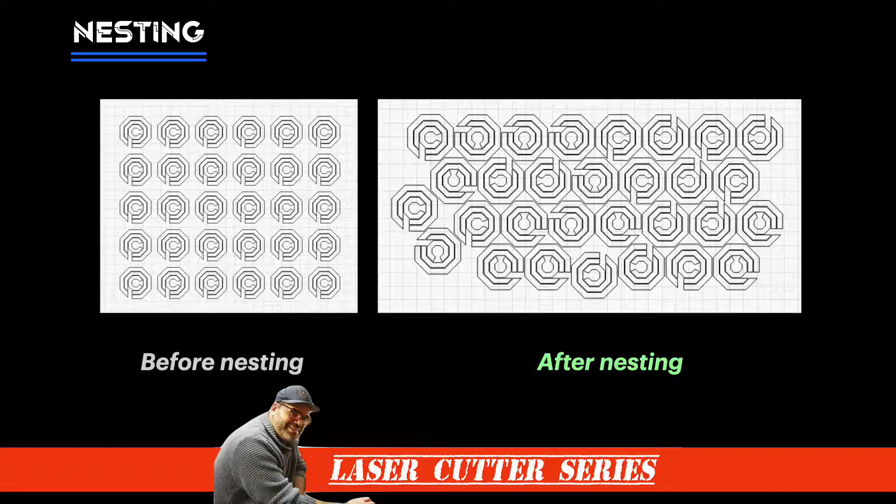Here are some examples of projects before and after the nesting process. As you can see, parts are laid out together, sharing cut lines, as well as working out how to utilize the material with the least amount of waste.

Because material costs are a large part of your process overhead, you want to get the most out of your material. With nesting, you can place more parts in a more compact space, which means you can get more out of your material and make the jobs run faster.

And that leads us into machine costs. The more time it takes to cut a design, the higher the price. Keeping pieces together reduces the travel time between the parts, making the cutting process a whole lot quicker, and the more effective your layout, the more time savings are passed on to you.

Now, if you're new to nesting, there are a number of options available to try out the process. Like everything, you can purchase dedicated services or software to do the nesting for you. But for this tutorial, let me share with you two free sites that are online and will allow you to try out nesting your designs.

The two sites we're going to look at are SVGNest and DeepNest. SVGNest requires you to upload an SVG file to allow the software to process your design online. DeepNest is an actual application that you can download and run locally on your computer.

Lightburn has integrated the functionality of SVGNest into its software, so all the heavy lifting and preparing of files, as well as sending them to the website, is streamlined and accessible from Lightburn's menu. So let's jump in and walk through how you can use nesting with your designs directly from Lightburn.

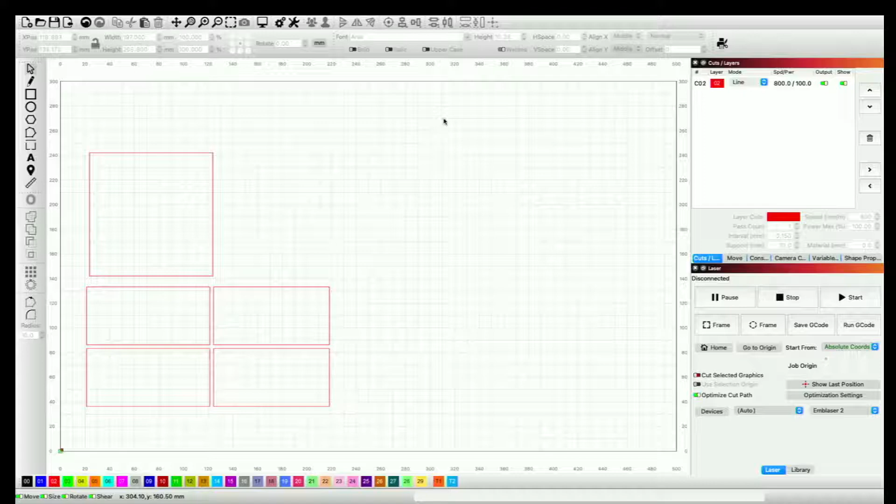I actually have them in my art library, and the very first one I'm going to bring in happens to be just a plain box, a normal box. You can see it's straight edges, nothing really too fancy. But if you imagine that I want to make three or four of these boxes, or I've got a piece of offcut that I want to make a box out of, I'm not too sure if this configuration is the best configuration that I can use.

So I like to keep all my processes kind of uniform. Black usually is my line cut, so I've just changed that over there.

I'm going to imagine that I have an offcut, so I'll create a piece just over here and say my offcut is, let's say, randomly, this big. Off the top of my head, I can grab this and bring it in here. Yeah, it kind of fits, it kind of doesn't fit. It's a little bit short, a little long, but this is where nesting is going to be really amazing. So to set up the nest...

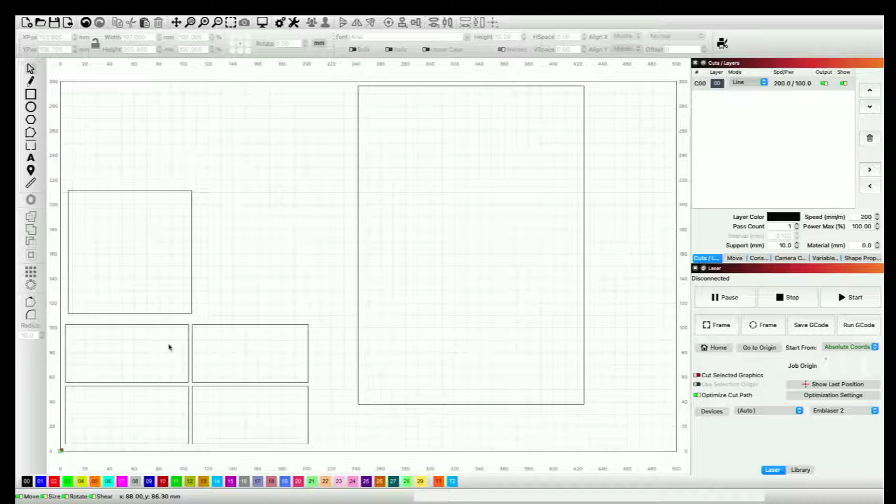Why this is important: you need to know what the material size is, because SVGNest needs a place to put all these pieces into. The way to actually set that up, and I've tried this a number of ways, and this is the most successful way, is to grab your designs and actually move them off the workspace. Don't ask me why, but if they're on the workspace, it kind of creates a double space as such.

I just want you to avoid some of the pain that I've discovered in the last couple of days. So it's really good to take this design and move it outside of the work area, and then leave whatever your definition of the material you're actually going to cut on the workspace.

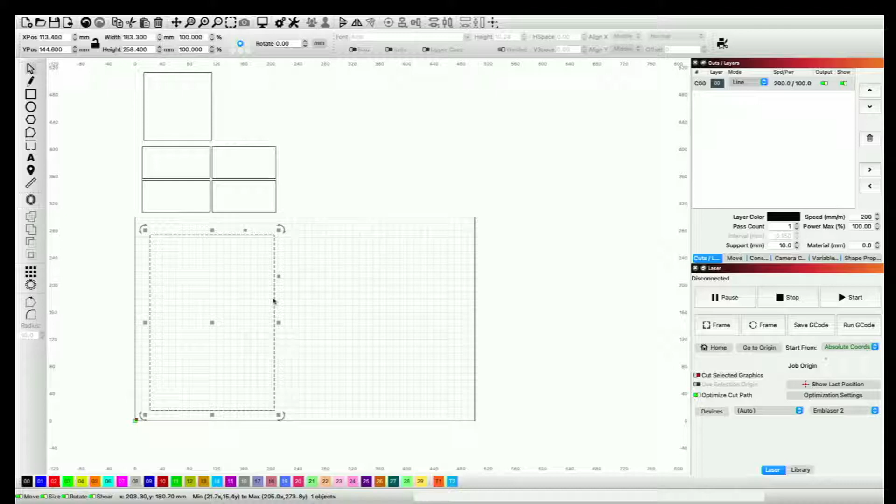From here, it's pretty simple. What you want to do is select all of them, or alternatively you can go Command A, select all, and then you come up to Arrange, and there's a new menu item here called Nest Selected.

When you hit that, immediately it's going to pop out and open up a browser window. I'm just going to open it up all the way, and that is actually sending us to SVGNest. SVGNest has nothing to do with Lightburn - this is a website, a free and open source nesting site for CNC laser or even plasma cutters.

This website is going to do the bulk of the processing for us, because there happens to be a little bit of processing and AI and kind of wizardry in the background here.

Our job now, the first time you do this in Lightburn - let me jump back to Lightburn, give me one second here. You'll see a pop-up that says the file name to import has been copied to the clipboard. Press OK when nesting is complete. It's a little bit cryptic.

What I've discovered is that if we pop back into... okay, it's not going to let me do it because I've trapped ourselves in this cycle. So that's interesting. While we're in here, it's waiting for the result, but I did want to show you that pop-up. So I'm going to hit OK, and I'm going to cancel that. I am going to go and start this nesting process again because it's locked us out of it.

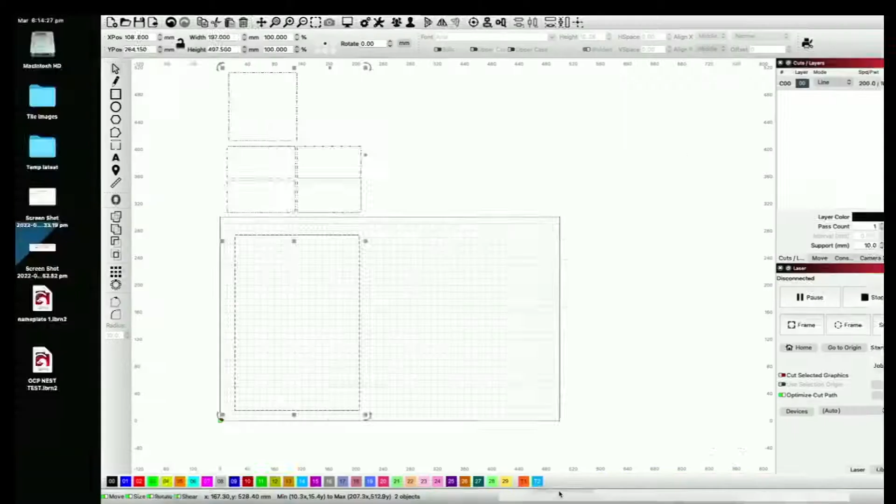It sends it out. Let's go pop over to good old Lightburn. And then it says here the file name has been imported, hit OK. And now it takes us back to our download area, or directory, and we've got an SVGNest output.

And the latest one, if we come down here, actually shows that design on that piece of material.

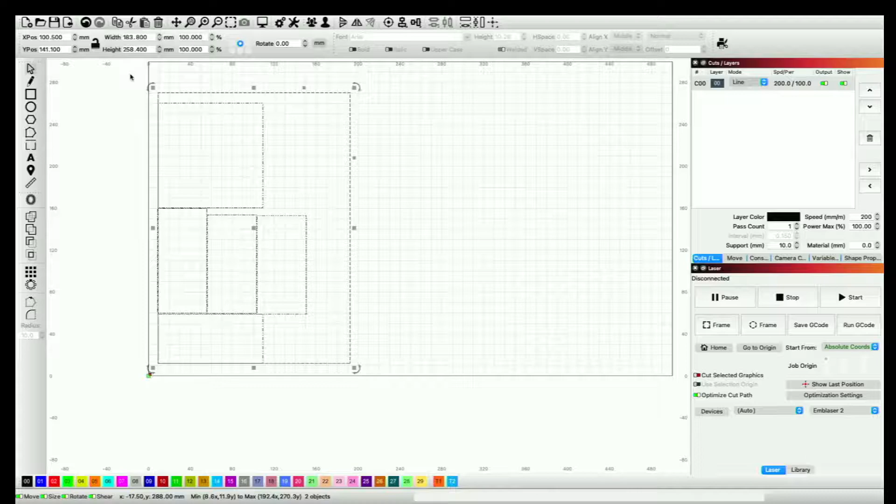So I can do a number of things now. I'm going to select it all—they're all individual pieces at this point. So I can come in and move it to my origin point, stick my piece of material in. Now I don't want to cut my material, so I can just delete that.

And I have an optimum path, not only cutting the pieces out, but also you can see here we are cutting on certain lines, so it'll be a faster process. Let's go and see here, see how it works.

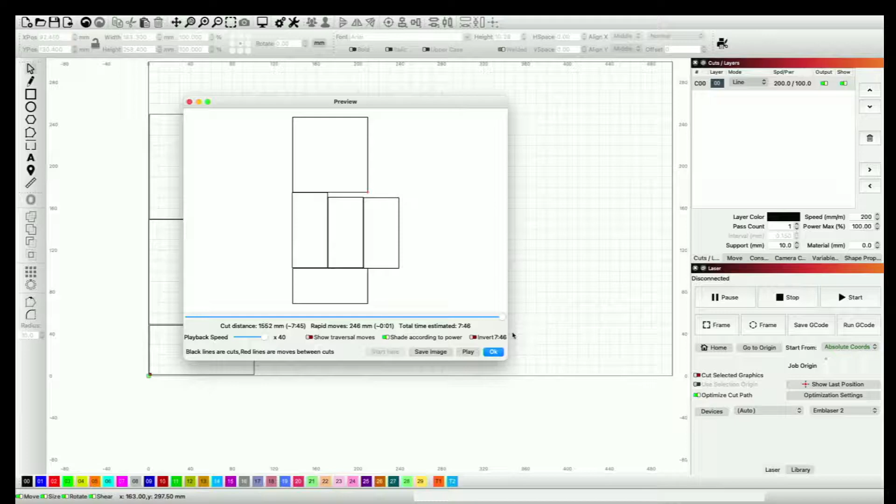There we go, perfect. So we have all those parts cut out pretty cleanly. All right, that worked well. That's the basics of using nesting.

You can see it's all integrated into Lightburn, but what if we want a more complex design? This is where things get a little bit interesting—I was going to say tricky, but not really tricky.

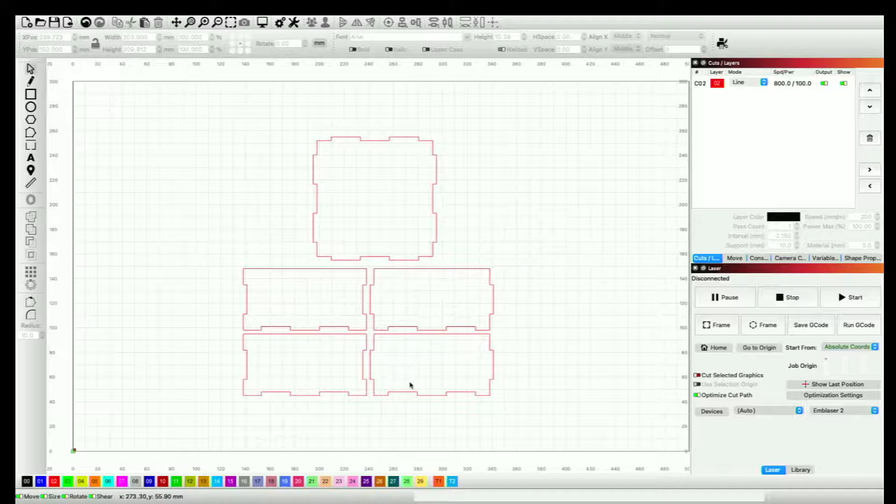I have another design here. It's the same box, and it happens to have finger joints, which means there's a little bit more to process for SVGNest. So let's first of all change it to a black line.

And I'm going to just move it over here, and draw myself a little bit of a box. Again, I'm just making this up as I go along.

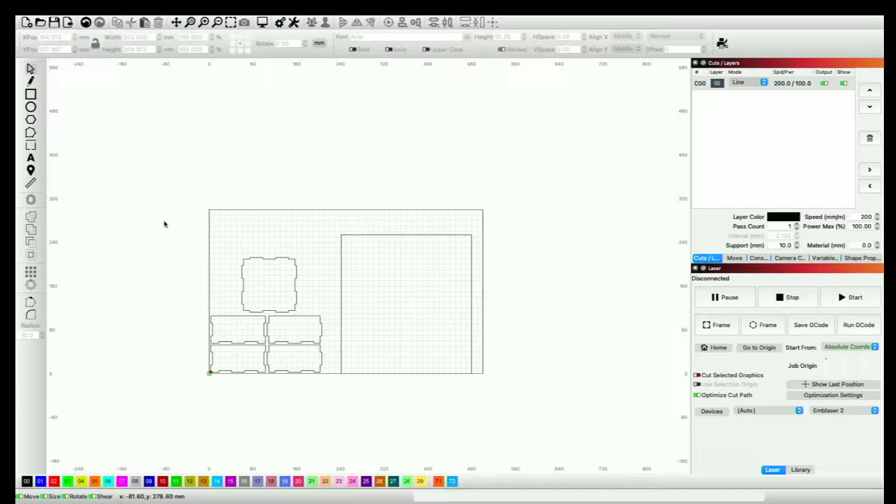The other thing I want to do is take this design and move it up here. If I leave it like this, actually, let's do an experiment—I haven't actually done it this way before. Let's see, we go upload SVG. Here's our Lightburn nest.svg. Let's give it a shot.

Start the nest. And you can see here, it's only put 3 parts. Well, it's now 4, but it may take us a long time to get that 5th part in. That's because what SVGNest is doing is it's taking into consideration all the different parts of the shape, all the different lines, and trying to work out the best configuration.

So if you're doing lots and lots of pieces that happen to have finger joints or cutouts, the more complex, and wow, that actually did that a lot faster than I thought. There's 5 by 5 pieces in here, so it worked it out a lot faster. I ran this once before, and it took me actually 500 iterations before it actually placed all 5 parts on the material. Could be because this piece of material is a little bit wider, a little bigger.

But I just want to show you here, compared to the original box shape that was just straight lines, how SVGNest is actually, I won't say struggling, but got more work to actually get this in the best orientation. And you know what? As it's working, you can see here, it's kind of butting up a lot of those lines. It's coming very close to what it can do, but it's got these pieces just kind of floating. So we'll let that run a little bit longer.

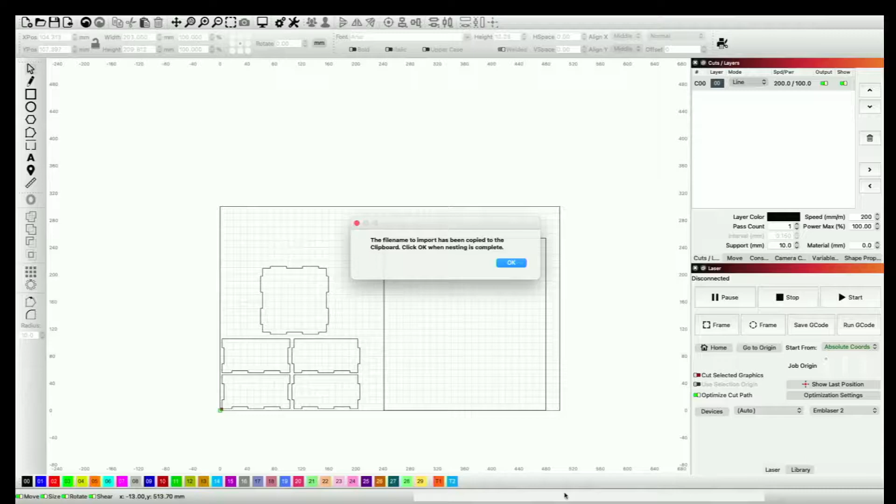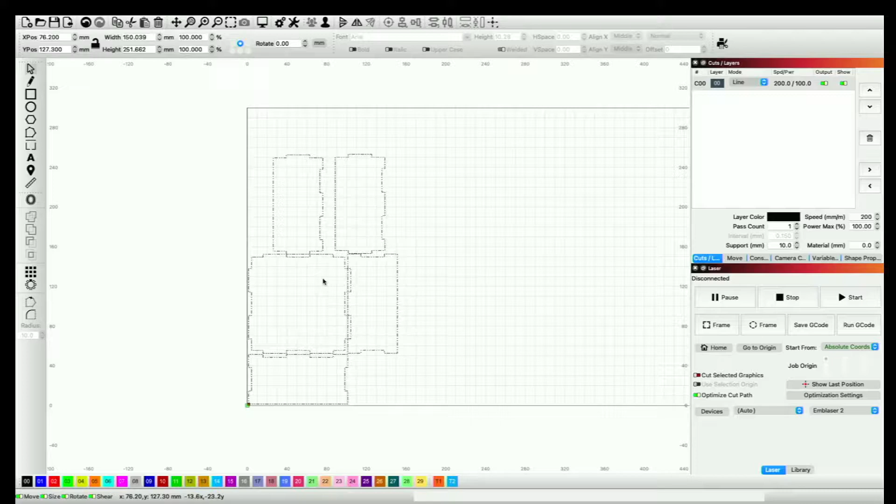All I need to do here is just pop straight back into Lightburn, hit the OK button. It's going to pop up my downloads directory, and I'm going to import it in. And you can see here, just like last time, or in this case, as I said, it was individual, I can delete the material and just bring the design in, put it as close as I can to my origin point, load up the machine and run.

I want to show you SVGNest kind of struggling with a little bit of a complex job. So in this case, what I'm going to do before we get the artwork is I'm going to place a full piece of material into my workspace. Now, in this case, I do have to take the design out because it's not on the workspace at all. So let's go up to my window, the ever-loving art library, and I'm going to grab that finger joint.

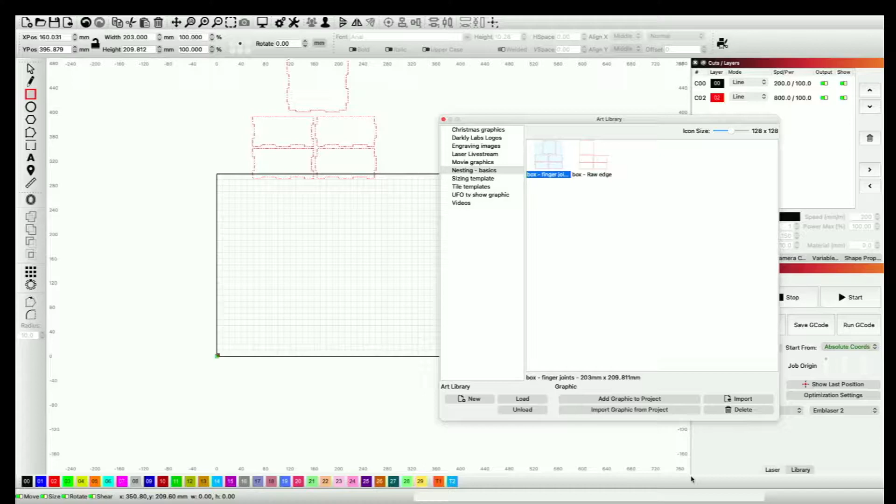And what I'm going to do is just close the art library up. I'm just going to scale this a little bit, if I can actually cancel out into the right thing. Let's do that. Just going to scale it down just a little bit. And of course I'm going to make that black as well, because that reminds me that that's a cut line. It's a good habit to get into, I think anyway.

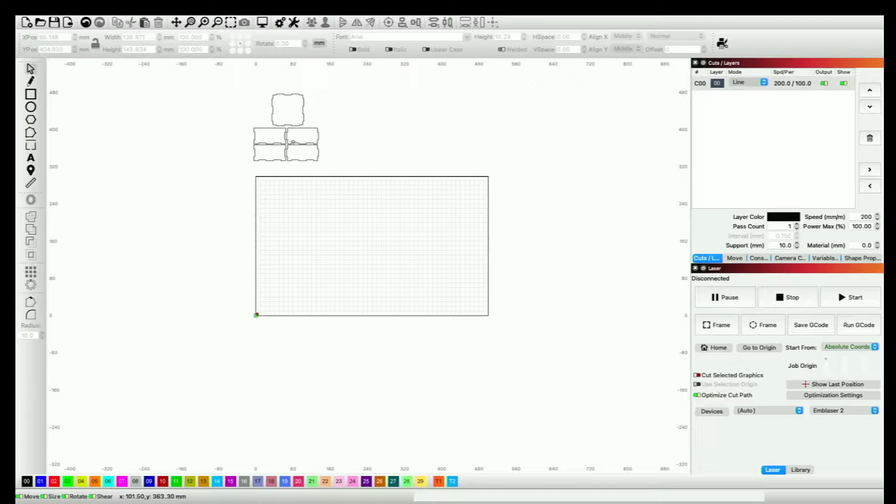So we're going to copy it. Let's copy one here. We'll just make sure it's not touching. We'll copy another one here. Let's see if we can just back out a little bit. I'm going to do another one here, another one here, and another one here. I'm going to hit Command A for all. Come back up to arrange. Hit the nesting selected. It pops me straight back out to the ever-loving SVGNest.

I'm going to close the other windows so I don't get confused. I'm going to upload. Of course, the first file always is the Lightburn nest file. Here we go. It's asking me, click on the outline to use as a bin. That's my material size that I'm using. Let's see if I can do this. There you go, it's selected. Now we're going to start nesting. And you can see here, let's see.

Now, in this case, it's only put half of those down. It's only put 15. It just got 16 in. Now, we know that it'll fit. There's no problem there. But because it's taking into consideration all the different lines that make up the sides of these boxes, it's going to take a bit of time. And I don't know how long it's going to take. And you can see already the process is a lot slower.

So the more you load up SVGNest with complex geometry, the longer it's going to take. But the good thing is that once you've run it once and you've got the result, you can save it and run that job many, many times. Here we are at 18. Let's see how long it's going to take. We'll let that run. And it can take quite a bit of time.

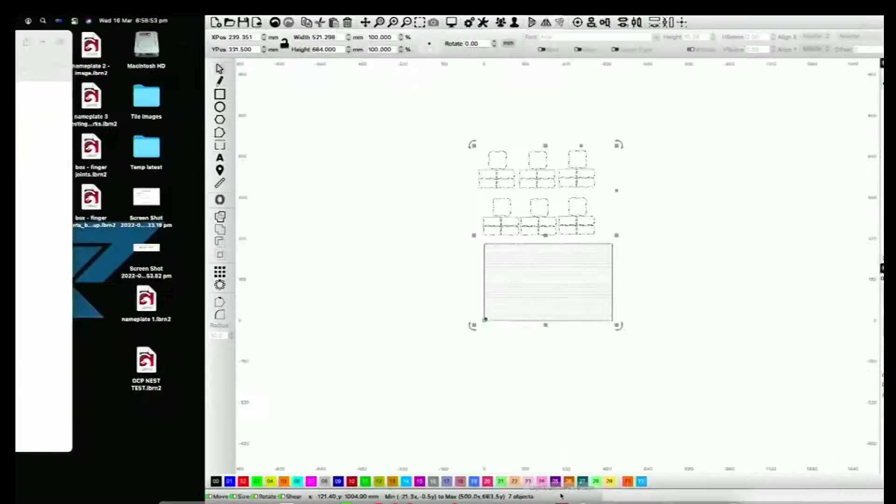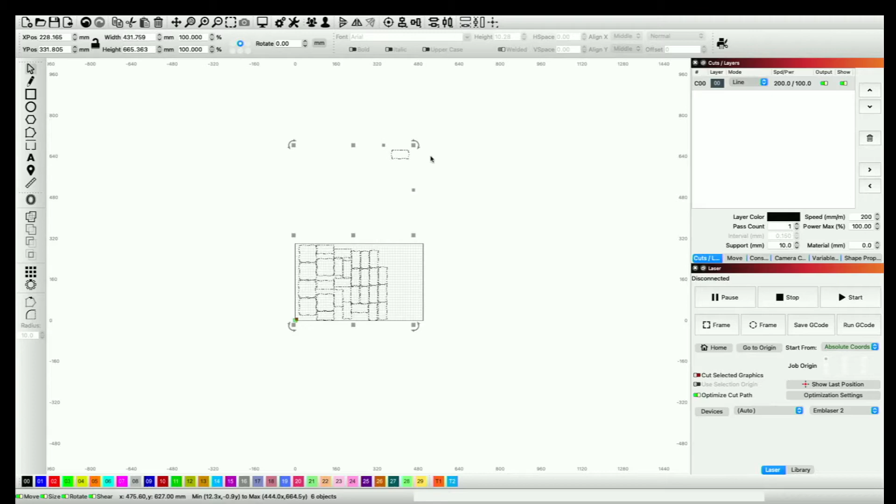Let's bring it into Lightburn. Good old Lightburn. Let's hit OK. Let's grab the output, and you can see there already this one piece didn't make it onto the bin or the material, but I can do that manually. So let's just grab these guys, and you can see in this case it's actually done each individual piece itself. So it's kept all the groupings because I had them all individually grouped. So that's something that we can play with a little bit later.

I'm gonna bring that in there, and I could flip it around. I'm going to make it all work out. There you go. There's another example of some of the limitations on nesting, some of the things that you can use. If I left that run for maybe another hour, it may have found a good configuration for it. Then again, I'm not too sure.

If you are going to use nesting, what I want you to take out of this is that if you are using a complicated model, such as the one in front of you, it's not something that you can do in a few seconds or a few minutes. Make sure you plan to use your nesting software and the integration into Lightburn ahead of time, because if you're in a hurry, it could take more time than actually running the job itself.

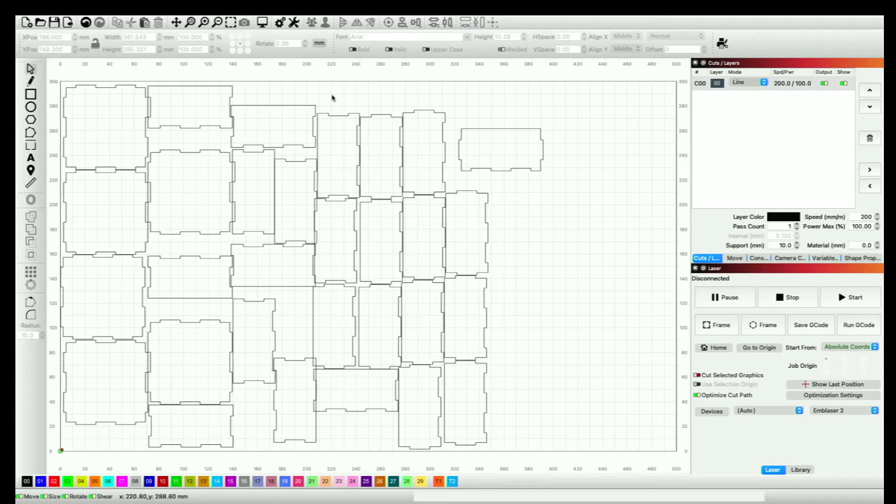We are definitely going to delve into nesting a little bit deeper with another video, but right now I wanted to show you how you can use SVGNest and Lightburn all configured within Lightburn itself. And that is how you can use nesting in a very basic way to improve your results with your laser.